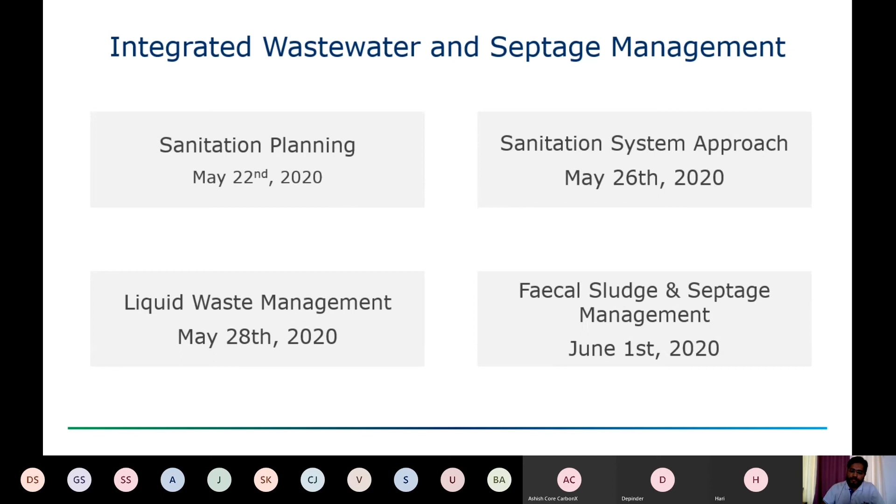So to recap the first session of sanitation planning: we saw that there are numerous urban challenges when it comes to sanitation planning. One of the 2 challenges which most urban local bodies face is that of professional capacity to plan and execute the plan or the systems, and secondly, the management gap - that is the professionals required to run the systems or the financial aid required to run these systems. Then we saw the concept of environmental health, which holistically takes into consideration not just human health, but also the health of the natural environment around us.

For maintaining the equilibrium between the natural environment and the built environment, we saw that we need 4 different kinds of environmental services: water supply, sanitation, solid waste management, and stormwater management. After that, we saw how environmental sanitation promotes social development instead of just designing infrastructure projects and executing them. Hence, we are prioritizing the quality of life when we take environmental sanitation as one of the approaches.

In the last session, we also saw how waste streams are segregated based on their characteristics. We saw major types of wastewater, which is brown water, gray water, black water, and then domestic wastewater. Then we saw there are different processes and management steps involved to manage these different waste streams. The processes involved are basically user interface, collection and conveyance, treatment, and reuse or disposal, whereas management consists of financial aspects, planning aspects, and operation and maintenance of the systems.

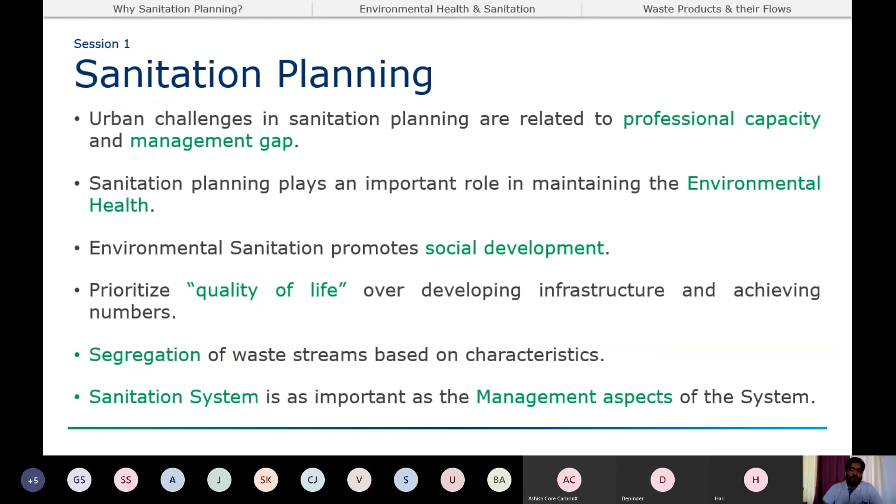Today, we are going to take a look at an approach towards sanitation planning called sanitation system approach. In this session, we are going to see different kinds of sanitation systems. We are going to see examples of one type of system, that is dry sanitation system. Then we'll deep dive into wet sanitation systems, which is mostly prevalent in most industrialized countries and also Asian countries. And then lastly, we'll take a look at 2 case studies - 2 very different case studies, but having a very similar output, that is wastewater treatment.

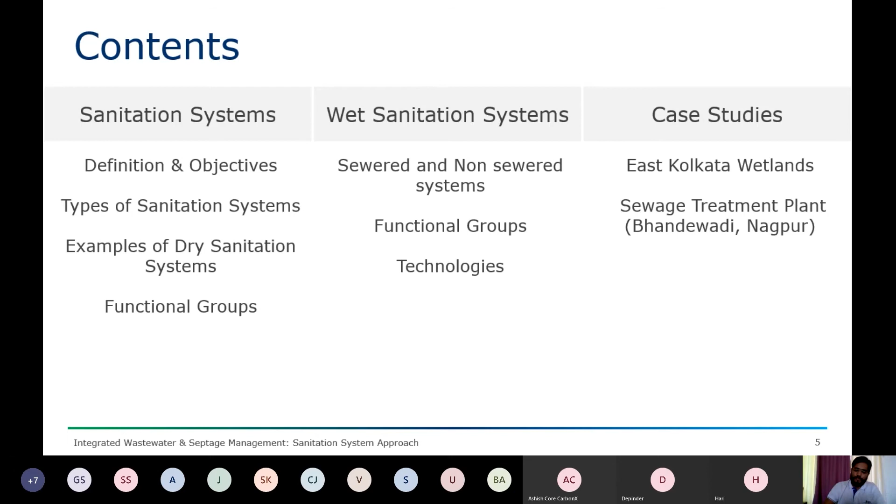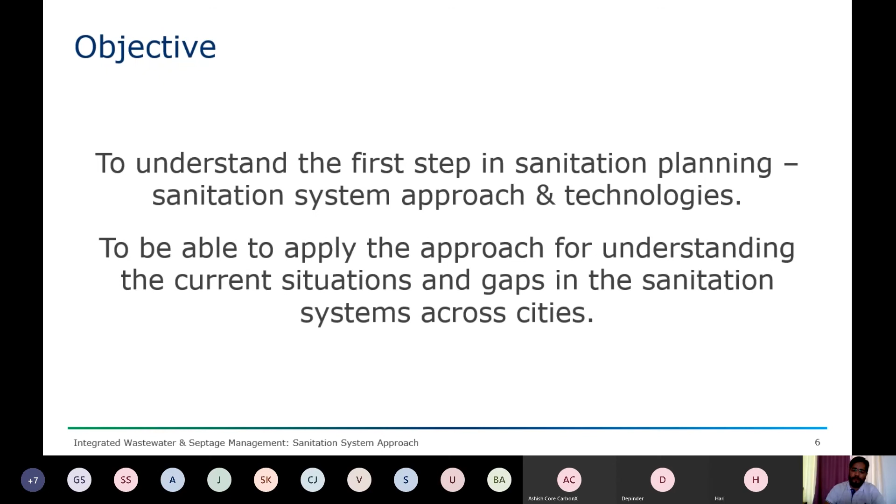The objective of today's session is to familiarize you with the sanitation system approach and discuss different technologies involved in these systems. This approach not only helps during sanitation planning, but even to understand the ground situation, to assess the situation, to find the gaps, and then to identify the correct solution for the sanitation system or for taking care of the human excreta. So to start with sanitation system, the definition of sanitation system is to take care of

human excreta and wastewater from the point of generation to the point of reuse or disposal. And during this complete process, there should be minimal human intervention. The objectives of sanitation system are basically in line with environmental sanitation, that is to protect and promote health as well as the environment. Then it should also be simple and straightforward in terms of technology. The most important is the affordability of the system - the whole system should be affordable and in such a way that it can be operated and maintained throughout its

life. The next objective is it should be culturally acceptable. Different cultures demand different types of user interfaces, which is one of the functional groups in the sanitation systems, and hence the systems you are thinking about should be culturally acceptable. And last but not the least, it should work for everyone - that is, it should work for the lower income groups, the middle income groups, and also the higher income groups.

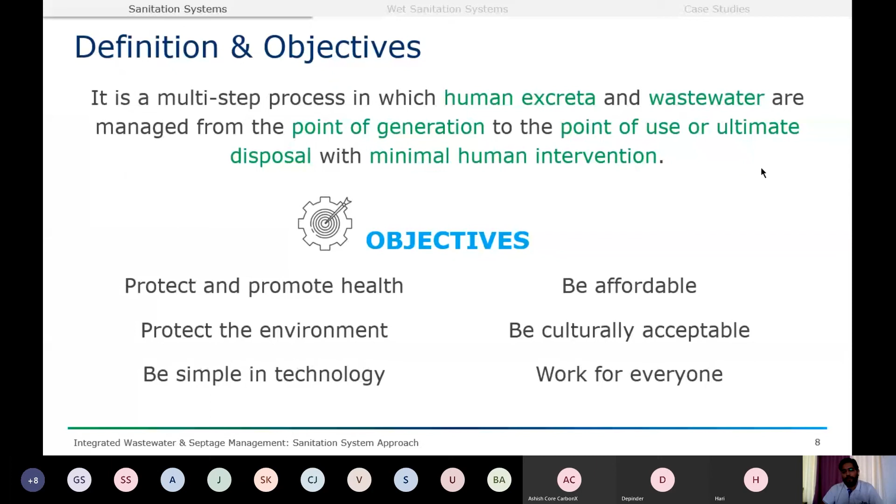On the screen, you can see different types of sanitation systems. Sanitation systems are basically divided into two types: wet systems and dry systems. Simply put, wet systems require water for flushing human excreta, while dry systems require no water. We'll be looking into wet systems in detail.

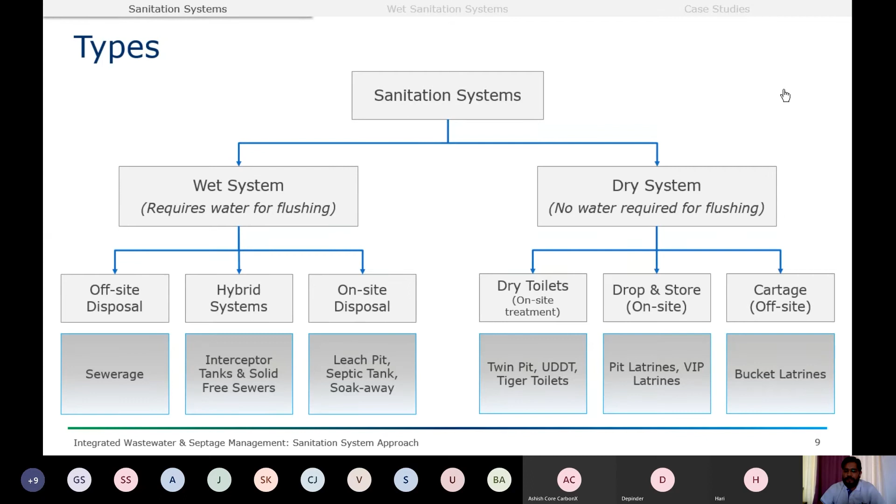So let's now focus on dry systems. Dry systems usually consist of three types: cartage, drop and store, or dry toilets. Let's take a look into the dry sanitation systems.

On the screen you can see two prototypes or two types of dry sanitation: a bucket latrine and a pit latrine. A bucket latrine is simply a bucket with a seat, sort of a toilet seat, on top of it. Inside this bucket, there is a plastic bag which holds all the fecal matter and the dry cleansing material.

It is easy to just pick up the bag, wrap it up, and give it to the person who has come for picking up the waste, then simply replace the old bag with a new one. These bucket latrines are quite famous or used in African countries where there is lack of water resources. They are also popular in slums where not enough space is available to set up an individual toilet for each household.

On the left hand side, you can see a simple pit latrine where there is a closed lined pit under the seat where the fecal matter drops and is stored. Such pit latrines need to be emptied after a few weeks or a few months, depending on the usage.

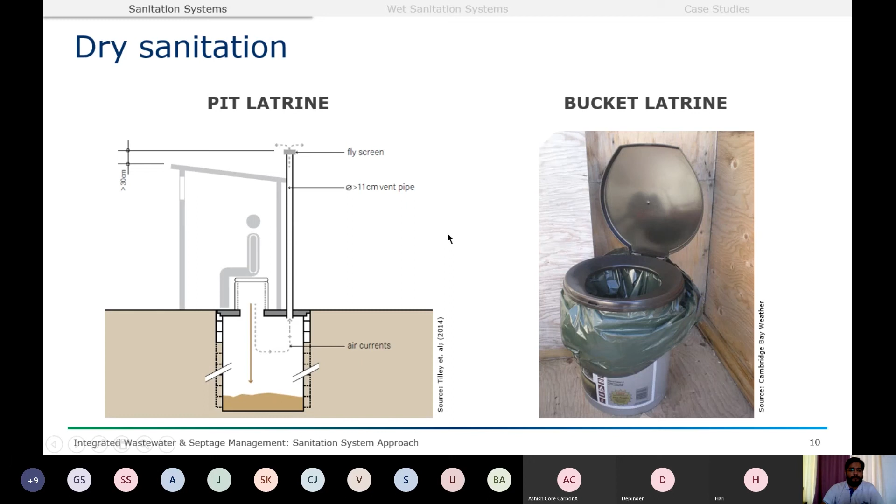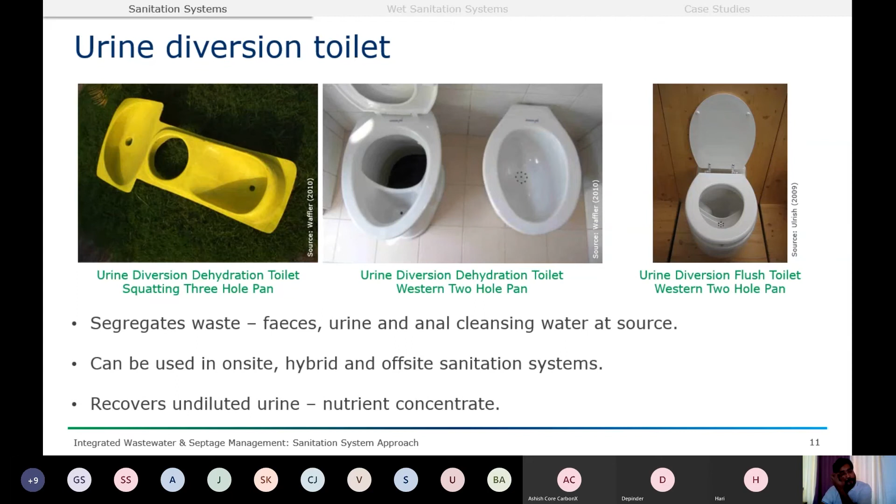A typical urine diversion dehydration toilet looks like this. It has a seat and two vaults underneath. When one vault is completely filled, the user starts using the second vault. The fecal matter dropped into the vault has to be mixed with a dehydrating agent like fly ash, wood chips, sawdust, or even soil.

Over a period of time, the fecal matter dries out completely and gets converted into something called human compost or humanure. Urine, which is also segregated using this toilet, can be stored in jerry cans, and after undergoing a sanitization process lasting 3 months, it can be applied to agriculture fields.

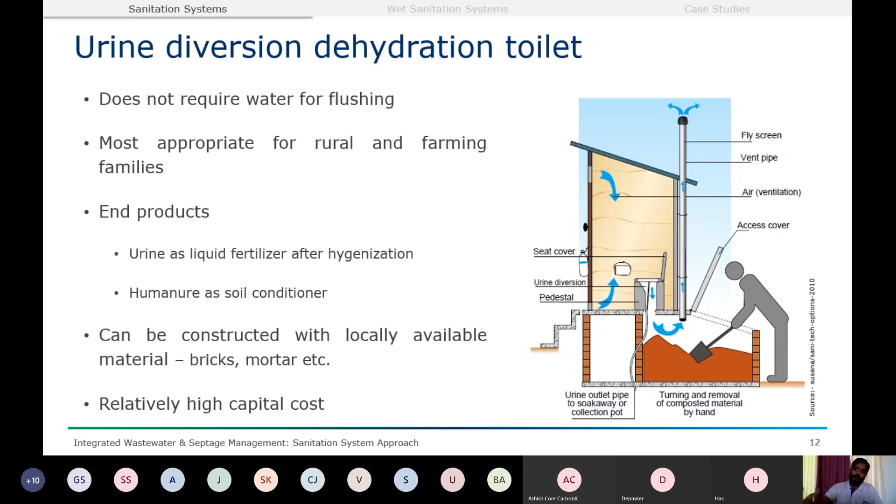The cost of a urine diversion dehydration toilet is relatively high compared to a pit latrine or bucket toilet, because there are two vaults and a requirement of two seats. So the area requirement is also high, as well as for the superstructure, whose function is to provide a safe enclosure for the user, which also increases the cost.

Next is a very recent innovation called Tiger Toilet. The superstructure looks very similar to a pour flush toilet, but beneath it there is a vault which contains vermicompost, and in this compost there are worms known as tiger worms.

When the user flushes the toilet, or even without water, when the fecal matter drops into the vault, the solids are retained on the surface of the compost where they are degraded by these tiger worms, and the water percolates through the drainage layer into the ground. As soon as the fecal matter drops, the process of degradation starts.

Timely emptying of the compost is needed, depending on usage, and it can be emptied after a few months. The cost of this toilet is lesser than UDDT, and hence it is more popular nowadays. This tiger toilet has been used in India as well as in Bangladesh, where it is more famous. Oxfam is one of the agencies promoting tiger toilets and implementing them across Bangladesh.

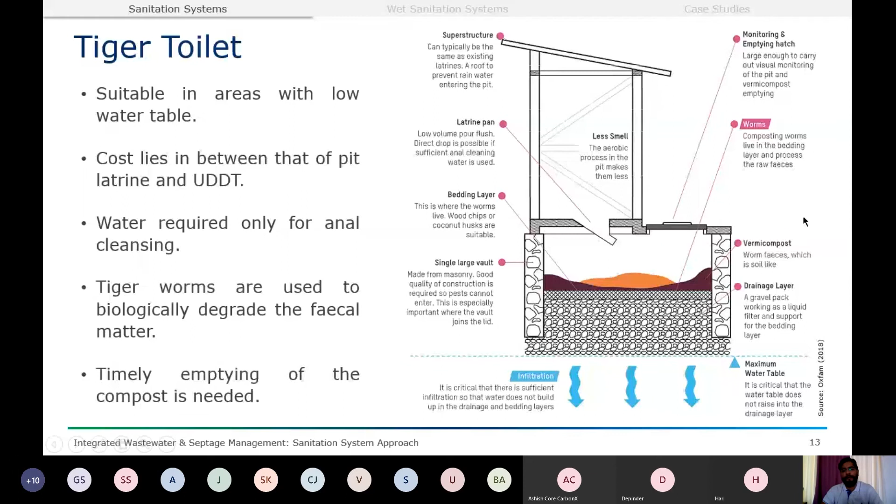So now that we've seen dry sanitation systems, we saw that they are quite simple in terms of approach. But when we move to wet sanitation systems, there are different functional groups. Functional group is the term used for all kinds of units which function in the same way, for example different kinds of toilets. These different types of toilets are termed as user interface.

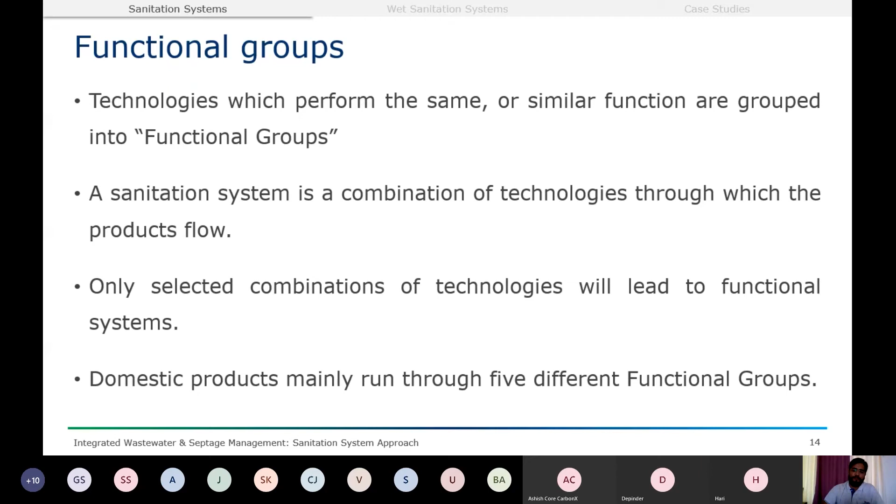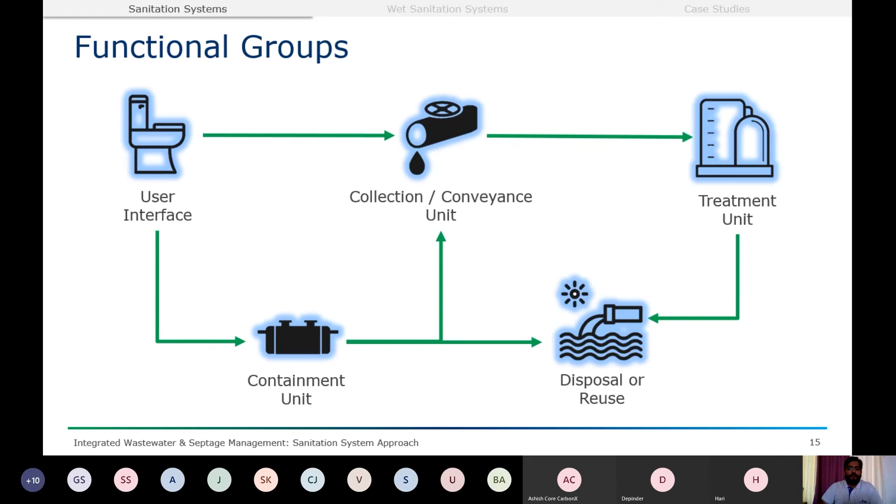These functional groups have been clubbed together to form sanitation systems. In the further slides, we'll see how these systems look like. On the screen, you can see 5 functional groups, starting with user interface, where the waste products are introduced into the system. Second is the containment unit, for example, a septic tank. Third is collection and conveyance, where the solids as well as the water is collected and conveyed to a treatment unit, which forms the 4th functional group. After treatment, whatever the treated products or end products are there, they are reused or disposed in the 5th functional group. These green arrows denote the way in which the waste products travel throughout the system.

Now let's take a look at wet sanitation systems. Wet sanitation systems are quite popular in South Asian countries and also in industrialized countries. Mainly the countries where water is abundantly available, wet sanitation systems are prevalent.

Wet sanitation systems can be divided into 2 categories: sewered and non-sewered. Let's first see what sewered sanitation means. Sewered sanitation mainly consists of off-site disposal, which needs sewerage and a wastewater treatment plant. All the solids and liquids mix together, are collected and conveyed through sewerage, then treated in an STP, and then disposed off-site, that is away from the household.

Whereas non-sewered sanitation mainly means on-site disposal, wherein the household uses the toilet and the liquid waste goes into a tank like a septic tank or soak pits, and the complete treatment happens there itself. So there is no requirement of collection and conveyance in this case for the liquid effluent.

However, in India, there is a thin line between sewered and non-sewered, and hence we have hybrid systems. In hybrid systems, the households have a septic tank where the solids or sludge gets settled, which is also known as septage. The effluent of the septic tank is put out by the household into the stormwater drains or the drains which run along the roadways. Since this effluent is not managed at the household level, this system is known as a hybrid system, and hence there is a requirement of collection and conveyance in this case.

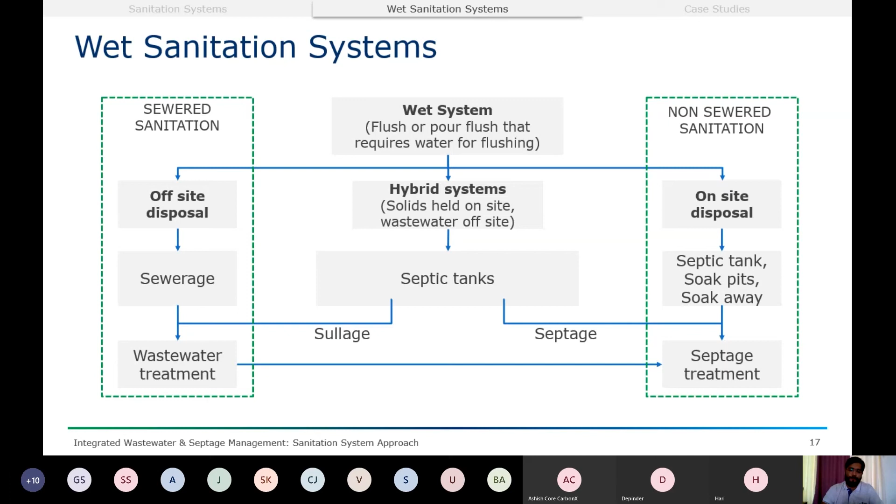In this session, we'll be taking a look at 4 functional groups in wet sanitation systems, the ones that arrive before treatment. The first is user interface, second containment, third conveyance, and last collection and transport, which mainly looks at collection and transport of septage or fecal sludge.

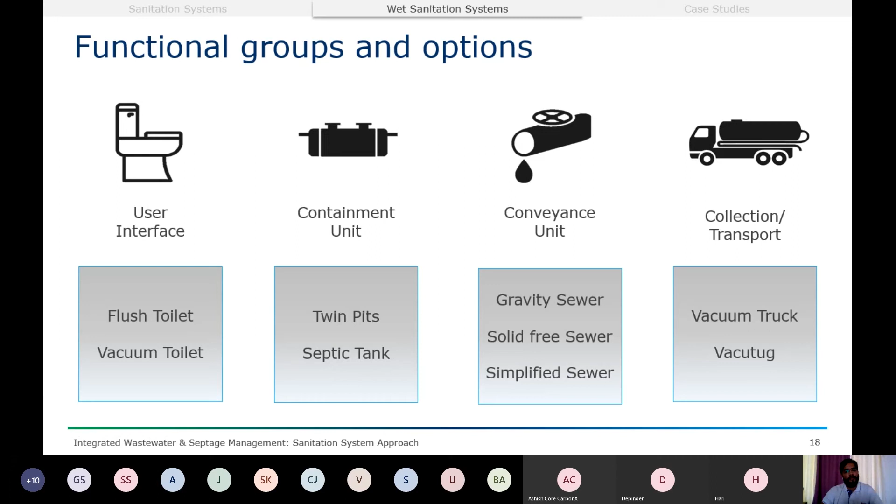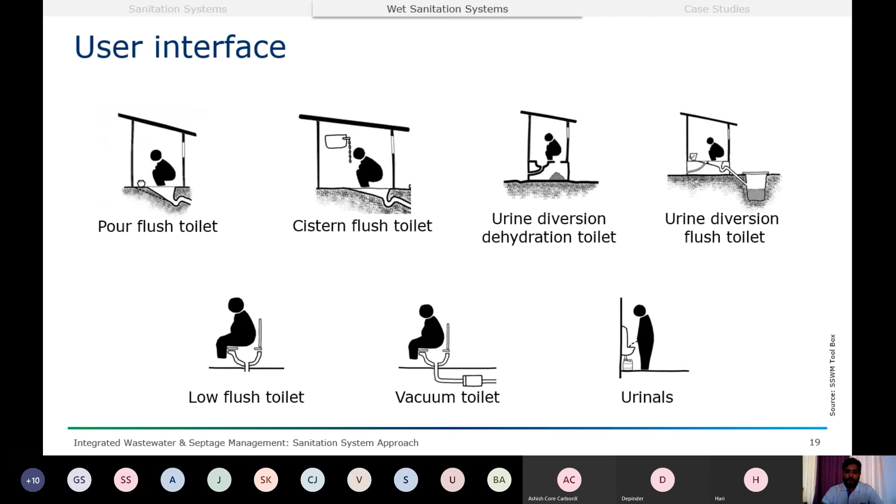The user interface is mainly the unit which is used where waste products are introduced into the system, such as flush toilets or vacuum toilets. On the screen, you can see there are different types of user interfaces in sanitation systems. It can be flush toilets, Ecosan toilets or UDDT, or low flush toilets, as these are used at airports or in hotels nowadays. Vacuum toilets are mostly seen in India in airplanes, but in other developed countries they are used for entire communities. For example, the World Islands in Dubai have a complete sanitation system based on vacuum toilets. Also, a simple thing like a urinal can be termed a user interface, because it brings urine into the system.

Now let's take a look at a type of flush toilet known as the pour flush toilet. In the first session we saw that pour flush toilets were introduced in the late 19th century. The S-trap, which is still being used, was invented in 1775, for the purpose of reducing odor, since these flush toilets, whenever excreta gets mixed with urine and water, produce a lot of odor. This S-trap has a water seal integrated into the pan, which helps minimize the odor in the toilet, enhancing the user experience.

Also, flush toilets nowadays have a very low capital cost, because these pans are produced in mass quantities. There are different materials used to make these pans. Mostly it is ceramic, but in order to lower the cost and make them more affordable in rural contexts, plastic or fiber-reinforced plastic pans are nowadays used.

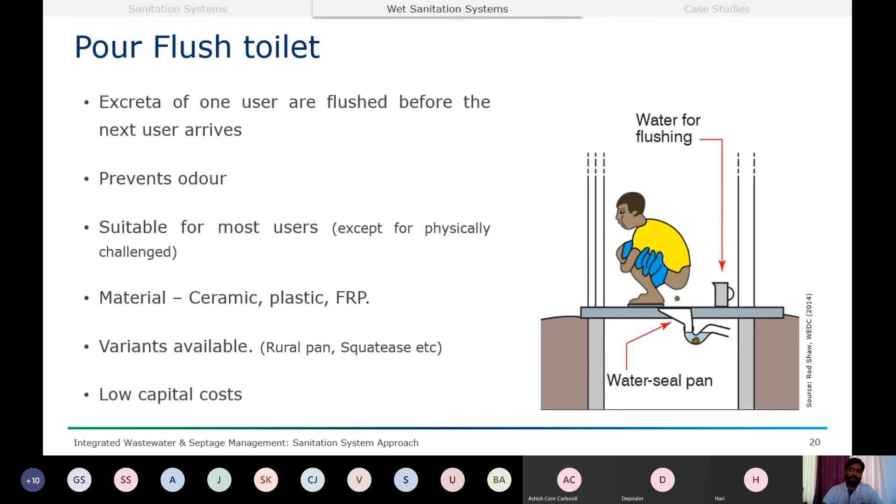The next is cistern flush toilet, where we have integrated a tank in order to flush the toilet. This kind of toilet was invented in the early 19th century, where the ball cock or ball valve was used in order to maintain the level of water into this cistern, and discharge at a pull of a lever a fixed volume of water, around 8 to 12 liters, into the water closet pan, hence flushing the whole system and replacing the water seal with fresh new water for the next user.

Nowadays, we do have low flush toilets which only consume 4 to 6 liters of water per flush.

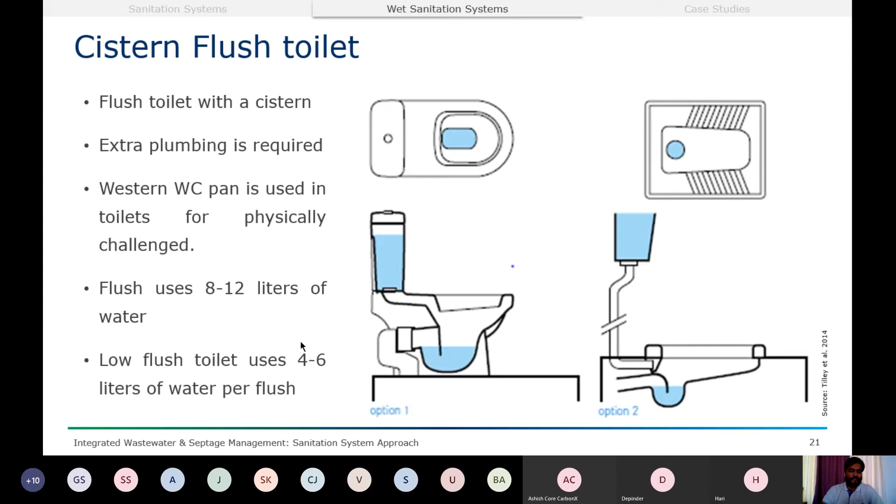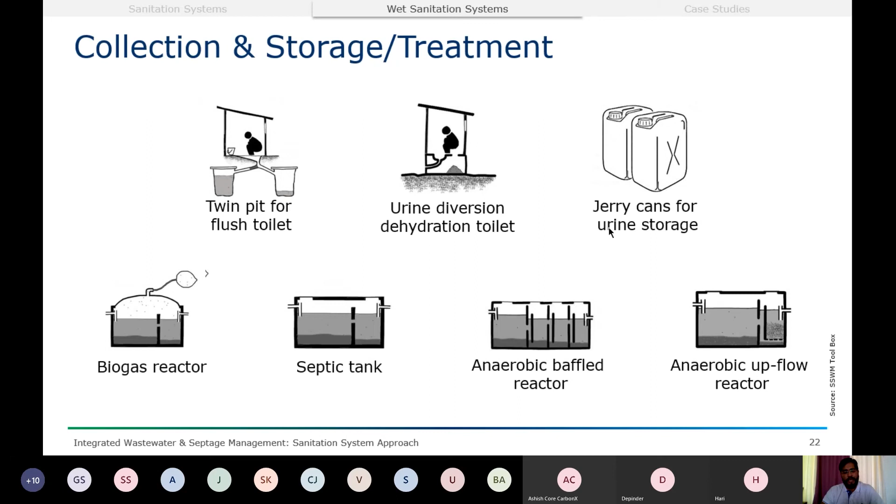Moving on, we have collection and storage as a functional group. Here we have several options ranging from twin pits or leach pits, the dehydration vault, jerry cans, which are used in case of UDTs for storing urine, or a simple septic tank.

The twin pit units are linked to a pour flush or a cistern flush toilet. Here we have two pits where the fecal matter is mixed with water and is flushed down into the pit. When the one pit fills up, the seal is opened and the fecal matter or black water is allowed to drain into the other empty pit.

During a course of months, the content of the first pit gets decomposed completely and converts into humanure. Whereas by the time the second pit fills, the user has to empty the first pit. It can be simply emptied using a spade, because in this case the material is now completely treated and there are very few pathogens. So it can be manually emptied using a spade with minimum requirement of personal protective equipment.

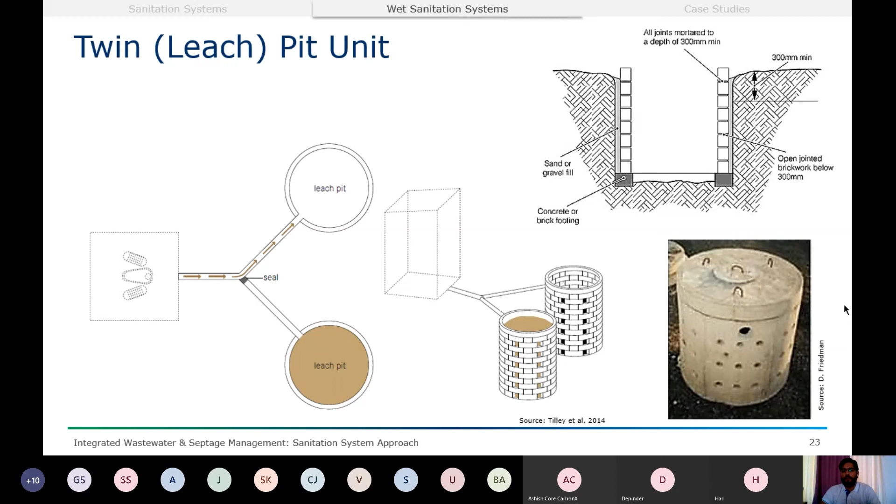On this slide, you can also see a prefabricated leach pit, which are designed and now installed in a lot of places to ease or to expedite the process of constructing leach pits.

The second option, which is mostly common and very much used in urban India, is the septic tank. Septic tank provides primary treatment in the form of sedimentation and biological decomposition of the settled solids.

When the wastewater or black water enters the septic tank, in the very first chamber sedimentation process occurs. The solids which are heavier than water settle down, and the scum or oil, fat, and grease, which is lighter than water, float on top. The clear water goes into the second vault where the same process continues, and then the water exits through this T pipe.

The function of the T pipe at the inlet and outlet is to allow the incoming water — the function of the T pipe is not to disturb the scum and the sludge, and to allow the incoming water to get introduced in the central part of the septic tank.

The septic tanks are designed in such a way that the sludge retention time is from 2 to 3 years, and in these 2 to 3 years, complete decomposition of the sludge happens.

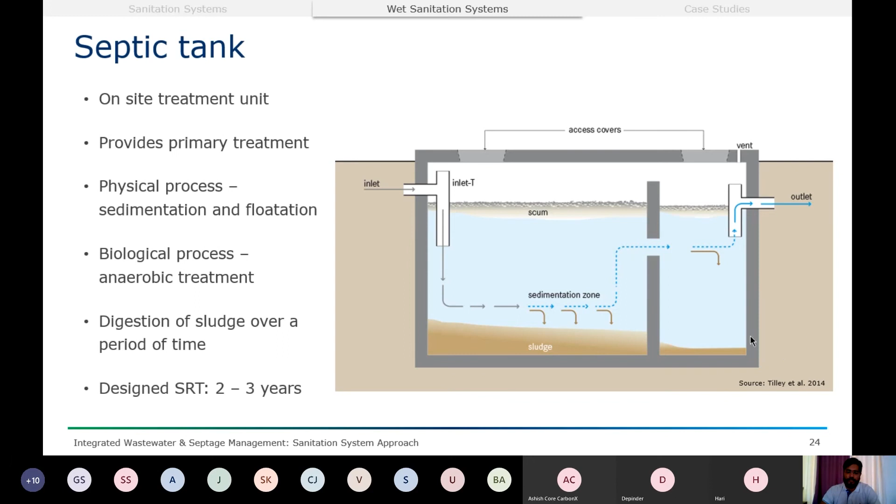Now, from the septic tank, there is a liquid effluent which comes out. Or in sewered sanitation, the black water or domestic wastewater needs to be collected and conveyed. And hence, we have different types of sewerage systems or different components used in sewerage systems.

The conventional sewers, which used to convey not just the domestic wastewater but also storm water during the monsoon season, are known as conventional sewers. However, now CPHEEO manuals stress upon the use of separate sewers, that is, different sewers for conveying the domestic wastewater and different sewers for conveying the storm water.

Simplified sewers are mostly used in slum areas where there is lack of space for implementing separate sewers. Small bore sewers are mostly used in conjunction with an intercepting tank.

To collect and convey the solids which are trapped on site in a septic tank or any other form of containment system, we do need motorized emptying and transport. We'll be looking at a few examples further in this session.

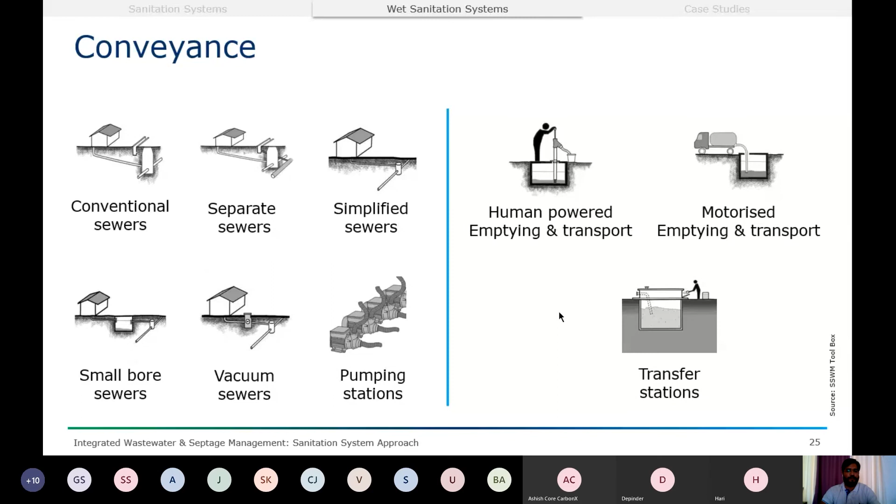Let's take a look at how gravity sewers work. In gravity sewers, all kinds of properties — households, commercial properties, or even high-rise buildings, which produce different characteristics of wastewater — everything is mixed and conveyed in a common pipe.

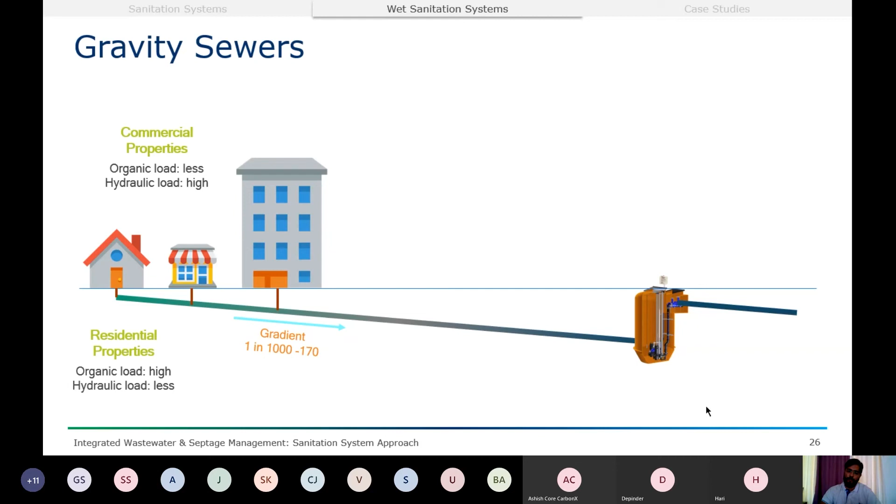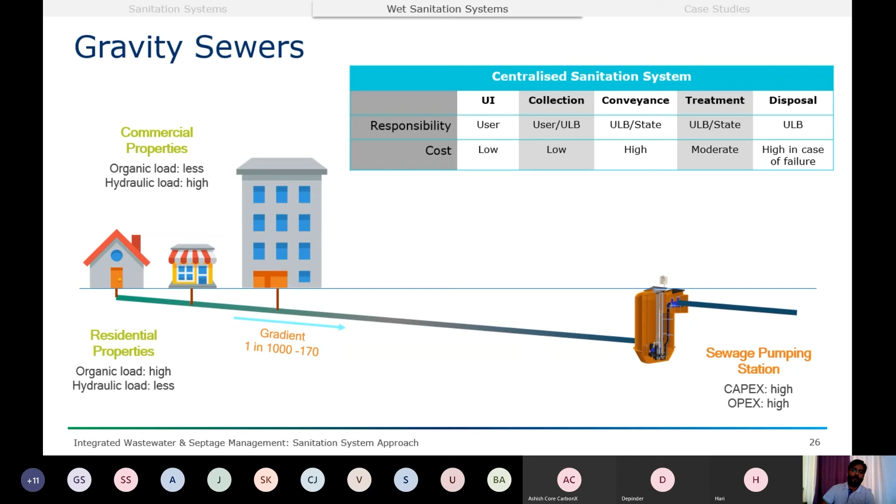As soon as the depth of this pipe reaches 6 meters, there is a requirement of having a sewage pumping station. The sewage pumping station lifts the wastewater from the bottom of the station to the top, and again this cycle continues. So the sewage pumping station has a very high capital as well as operational cost and is an integral part of gravity sewers.

Let's look at how solid-free sewers are different from gravity sewers. Although gravity is used here to convey the water, each property has its own septic tank. A septic tank traps all the solids and allows only the liquid to flow out. The liquid, since it contains no solids, can be conveyed over larger distances with a smaller gradient, and hence we can cater to a large number of properties without the need for a pumping station.

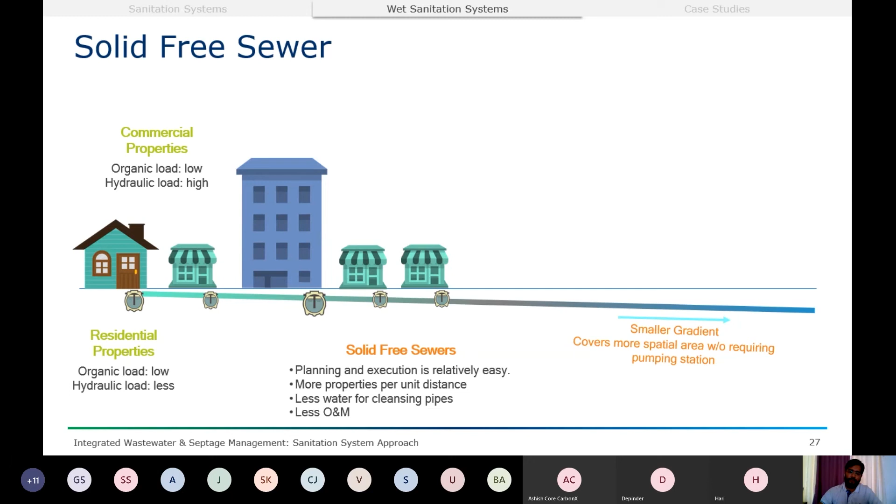Solid-free sewers are relatively easy to operate and maintain, and since they are laid at a shallow depth, the capital cost of solid-free sewers is significantly less as compared to gravity sewers.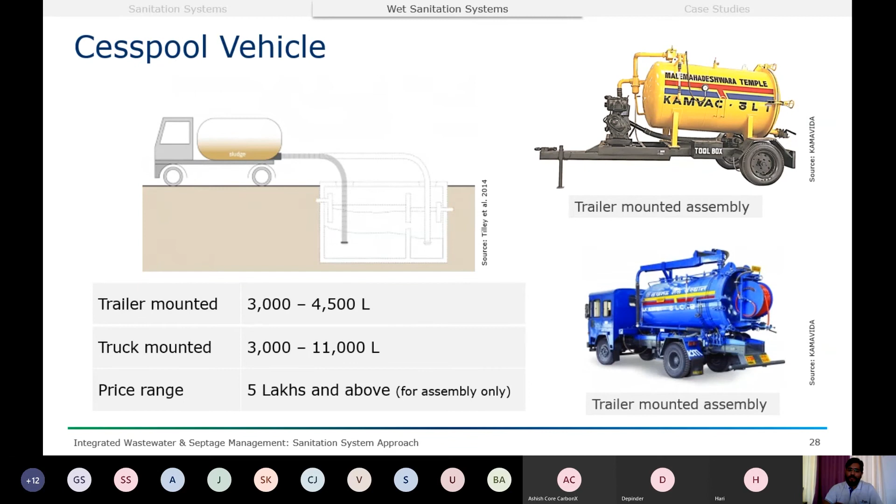The second type is a truck mounted assembly. The chassis of the truck holds the tank as well as the other accessories required for the cesspool vehicle to operate. In truck mounted assemblies, we can have variants starting from 3,000 liters up to 11,000 liters. The price range of these assemblies starts from 5 lakh and above, but that 5 lakh is only the cost of the assembly - the cost of the truck or tractor is additional.

Let's take a deeper look into the components of cesspool vehicles. The most important component, which sets it apart from a normal water tanker, is the vacuum pump itself. At the bottom of the truck, you can see the vacuum pump, which has three main components: the vacuum pump, the hydraulic motor, and the service liquid or oil pump. All three of these are required to operate the vacuum pump.

Then comes the tank and its accessories - such as the outlet pipe, which also functions as the inlet pipe, and the hatch or door itself, which swings completely open so that during maintenance, or to do something from inside, the tank can be fully opened. There are also different accessories or safety features which protect the vacuum pump from the liquid itself.

The process by which the vacuum pump works is very different compared to a centrifugal pump. In a centrifugal pump, the water flows through the pump, whereas in a vacuum pump, it's the air which flows through the pump while the liquid is sucked directly into the tank and stored there. The vacuum pump needs to be protected from solids as well as moisture, and hence various safety features are required.

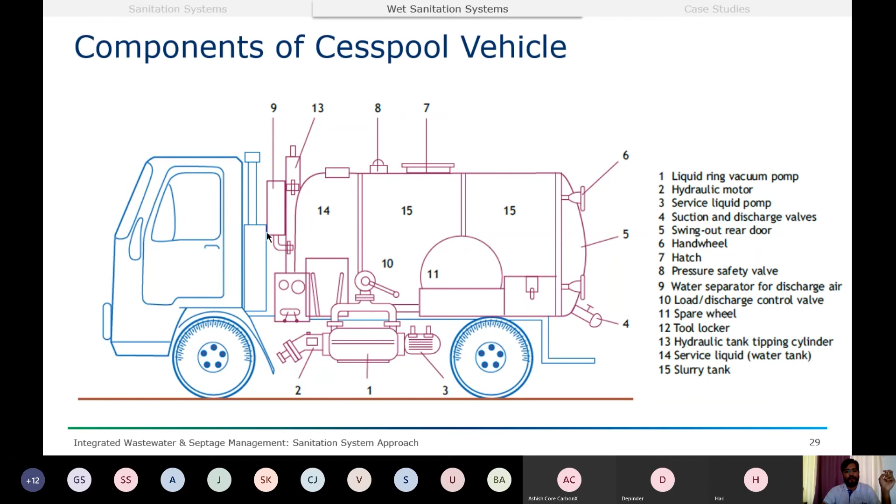The minimum width of cesspool vehicles is 3 meters, and hence most of the time these vehicles are not appropriate for catering to septic tanks in slums or communities with very narrow roads. Also, the suction power of the vacuum pump allows only 100 feet of suction, so sometimes it's not possible to park the vehicle next to the septic tank and empty it.

Hence there is a requirement for a smaller version of a cesspool vehicle, also known as a Vacutug. The Vacutug is a trailer mounted assembly - on the left side you can see a similar assembly mounted on a smaller trailer. The capacity of this tank is 300 liters, and it can be pulled by humans - 2 or 3 persons are enough to pull or tug this Vacutug. On top of the tank, you can see the vacuum pump and motor installed, which creates suction in the tank and sucks in all the fecal matter and septage into the tank.

The picture on the right shows a motorized option, wherein the motor used to run the vacuum pump can also be used to power the front wheels of the Vacutug. Since motorized power is given to the front wheel, humans don't have to tug it, and hence we can have bigger capacities of tank installed. Typically, a 300 to 700 liter tank can be installed on a motorized option.

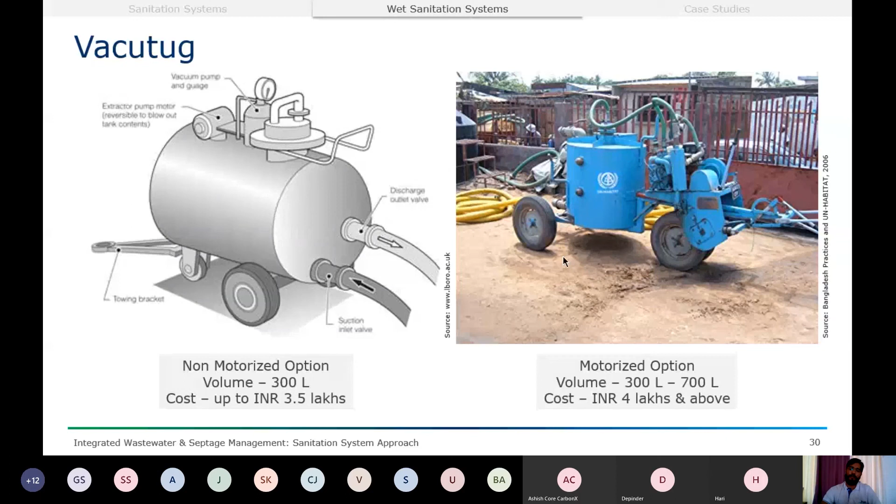The function of the Vacutug, however, is only to empty the septic tank and convey the contents from the household to the cesspool vehicle. Since the capacity of Vacutugs is so small, they cannot be used for conveyance, because tugging these vehicles or using a motor can be quite costly. Hence they are used in between the cesspool vehicles and the septic tanks.

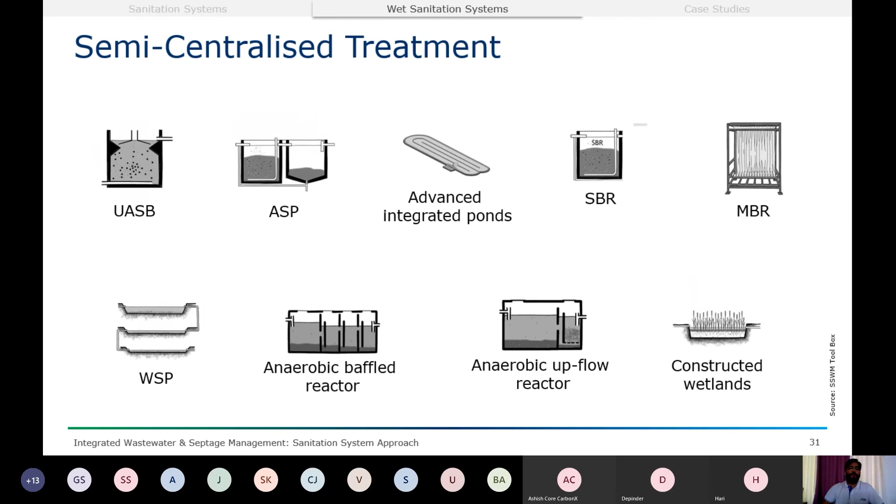The next functional group is treatment, where we have different kinds of treatment, natural as well as mechanized, aerobic or anaerobic process. However, due to the limitations of time, we cannot cover the treatment systems or treatment units in this session. We'll be having a different session altogether, prioritizing only treatment options.

And the last functional group is reuse or disposal. Usually the treated products, such as treated water in a centralized STP or the biosolids, are disposed of. The treated water mainly goes to streams or surface water bodies, whereas the biosolids are usually dumped onto the land or taken to the landfill.

However, there are several reuse options available. Agriculture can be one of the most important sectors where the treated end products can be used. The biosolids can be very well used as compost. The water, which can be made rich in nitrates and phosphates, can also be used for fertigation.

Next is aquaculture. Aquaculture is cultivation of fishes or water-based agriculture. So the treated wastewater can also be used in aquaculture. We'll be seeing one such case study in this session.

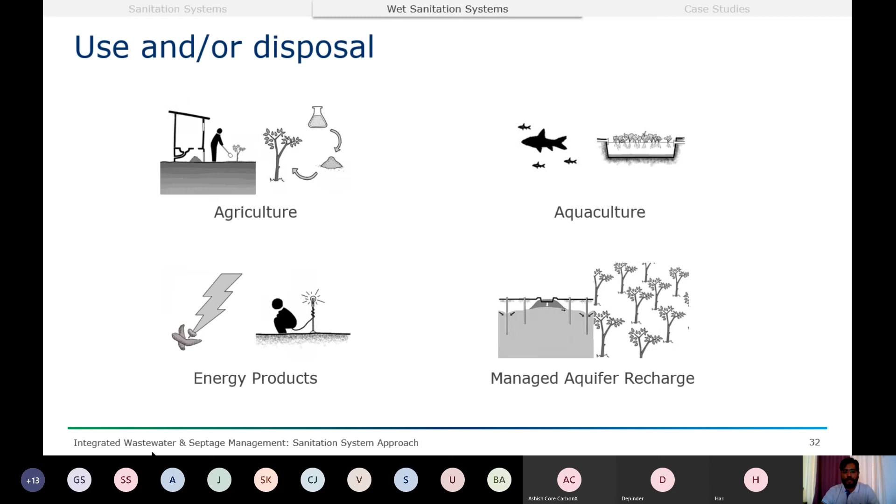There are several energy products, that is biogas or methanation, which can be done on sludge, and hence we can also get energy products. And lastly, recharge. The treated water can also be recharged into groundwater. However, it needs to be managed and monitored carefully. Hence, this technique is called managed aquifer recharge, also known as soil aquifer treatment. You can get a lot of information regarding managed aquifer recharge and soil aquifer treatment on the internet.

Now let's visualize how the sanitation system looks like, how these functional groups are interlinked to each other. On the screen, you can see a quite elaborate sanitation system. I'll explain the sanitation system in detail.

On the very first column, you can see different types of waste products. In the second column, you see an interface. In this case, since this system is describing a twin pit toilet, we have a pour flush toilet here. The output of this pour flush toilet is black water, which is diverted into a collection and storage unit, typically known as twin pit or leach pit, where the contents are converted into pit humus and need to be emptied and conveyed, and then reused for application in agriculture.

The grey water, however, has to be handled separately. The most simplest method in which grey water can be handled is to use a soak pit or a leach field. So this is how we can see how a sanitation system can be visualized.

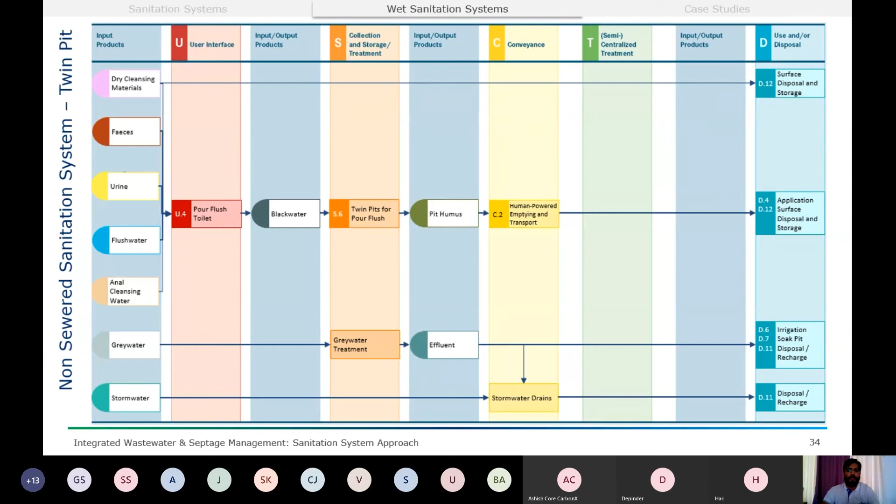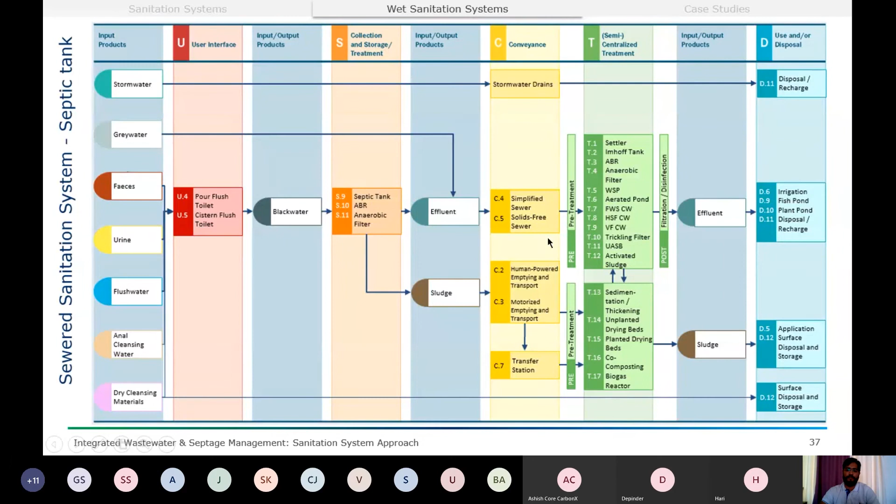Lastly, the most simple or very straightforward system is a sewered sanitation system, wherein the black water or domestic wastewater is collected and conveyed using gravity sewers, where it goes into a centralized STP. The treated wastewater is usually disposed of into rivers and the sludge is sent to the landfill.

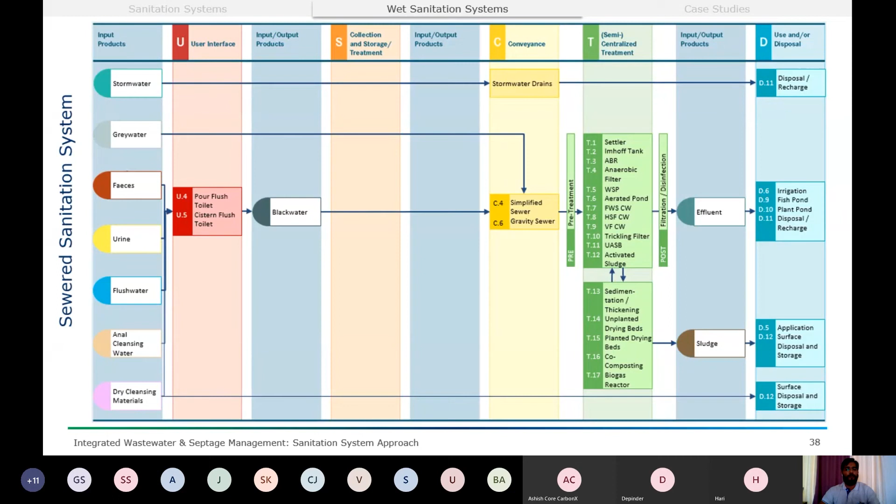So in this way, we can visualize different kinds of sanitation systems. It needs to be understood during sanitation planning of a city that different wards or different regions in a city can be catered to by different sanitation systems, and it largely depends on the population density as well as the availability of area. We'll be looking more into the applications of different sanitation systems in the next session.

So in this case, whenever we are doing sanitation planning, an approach called backwards planning is really useful. In this approach, we try to prioritize reuse. We see what are the avenues for reuse of treated water as well as biosolids in the city or in the given context. From that, we decide what should be the quality of the output of the treatment plant, that is, the quality of the treated water as well as the quality of the biosolids.

Then we design the complete treatment system, and understand what inputs are required to implement, operate and maintain these systems. So basically, what materials are locally available? What kind of human resources or professionals or experts are required? What are the finances? And what sort of extra information from the ground would be required to start the planning process itself? Hence, during preliminary surveys or recce visits for sanitation planning, we usually start from the end of the sanitation system.

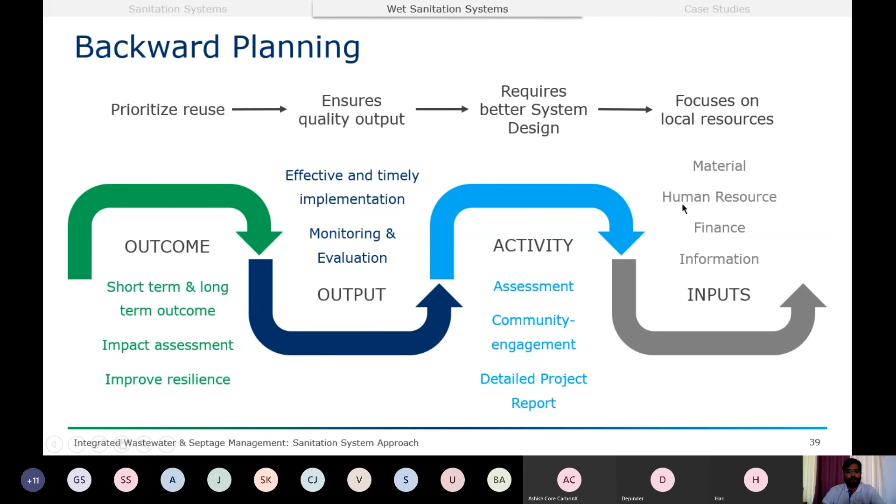Let's take a look at two case studies. Both are focused towards centralized systems. One has sewerage and an STP, and the other has open drains or closed drains, and also in some parts there is sewerage, but the treatment is done in a very natural way.

The first case study is that of a sewage treatment plant situated in Bhandewadi, Nagpur. This STP has a design capacity of 130 MLD and spreads across 12.5 acres of area. It's a huge plant, based on a sequential batch reactor, also known as the SBR process. The key element of this whole project is that the treated water is supplied to a thermal power plant, which is 18 kilometers away from this STP, supplied using a pipeline. Daily, the major chunk of treated wastewater is conveyed to the thermal power plant, where it is used for processing fly ash and for condensation purposes.

So you see here, the whole project was conceptualized by finding the right stakeholder who could reuse the treated water, and the treatment plant and sanitation system were designed accordingly.

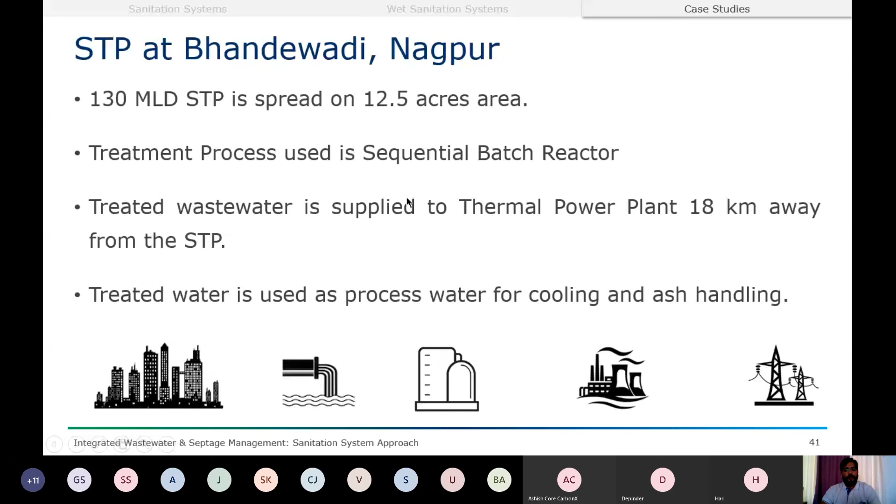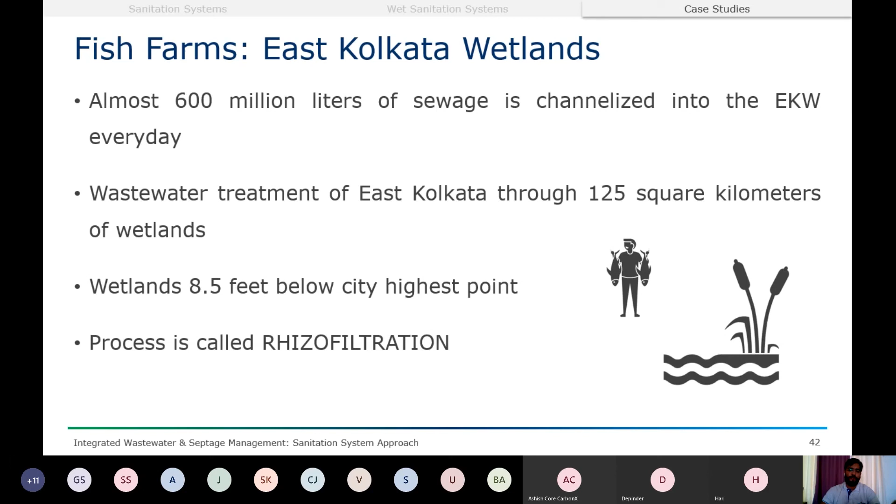Unlike this very technical or technological approach is the second case study, which is fish farms in the East Kolkata wetlands. These wetlands in the east part of Kolkata cater to almost 600 MLD of sewage on a daily basis, conveyed using a network of sewerage systems and also open and closed drainage systems. The wetlands spread over a total of 125 square kilometers. The wetland is situated 8.5 feet below the highest point in the city, and hence the sewage flows under gravity. The process implemented here is mostly rhizofiltration.

The water is then diverted to sedimentation ponds where the solids settle down. Then there are a series of ponds used for pisciculture or fish cultivation, starting from egg pond, nursery, rearing, stocking pond, and harvesting.

The treated water from the harvesting pond is also used in agriculture. And the fish harvested from these wetland systems is a good source of food for Kolkata city.

However, although this whole project is not very technical, for the success of this whole project, the natural conditions were quite conducive - such as hot and humid climate, which is required for fish culture, the shallow ponds or series of shallow ponds, and the area itself.

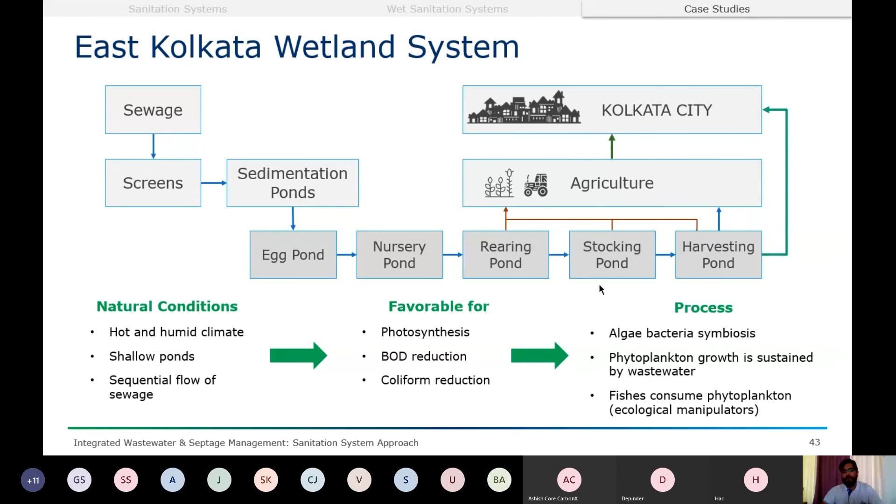The treatment is done using photosynthesis by plants grown naturally in these wetland systems. The BOD reduction happens substantially, and also due to the large hydraulic retention time, coliform reduction happens. This process is a natural process and can be checked out in the video further.

So let's take a look at the video. First, let's see the video of Bhandewadi STP.

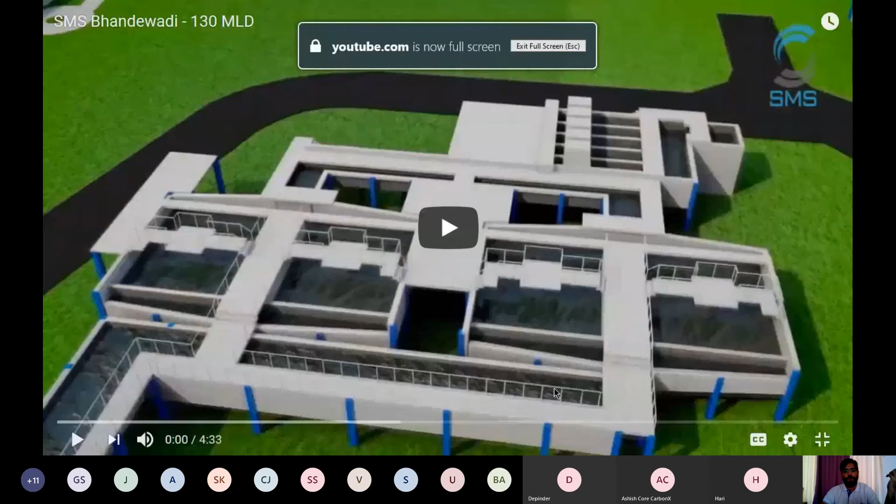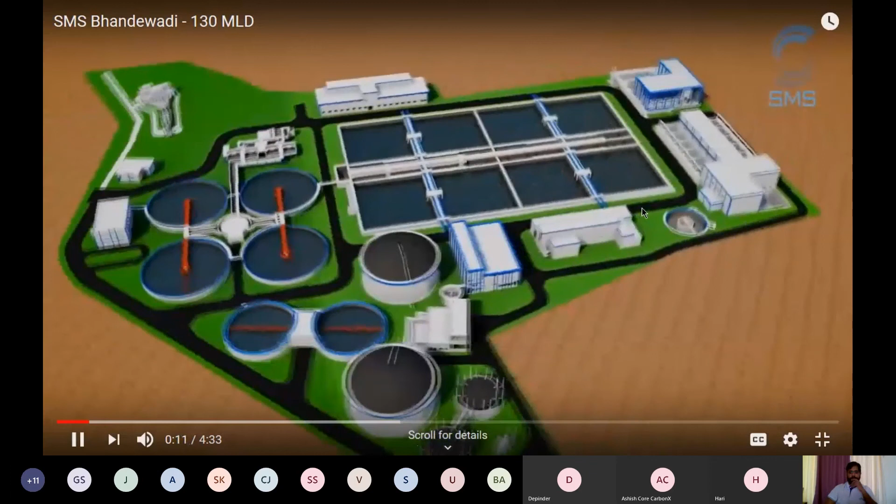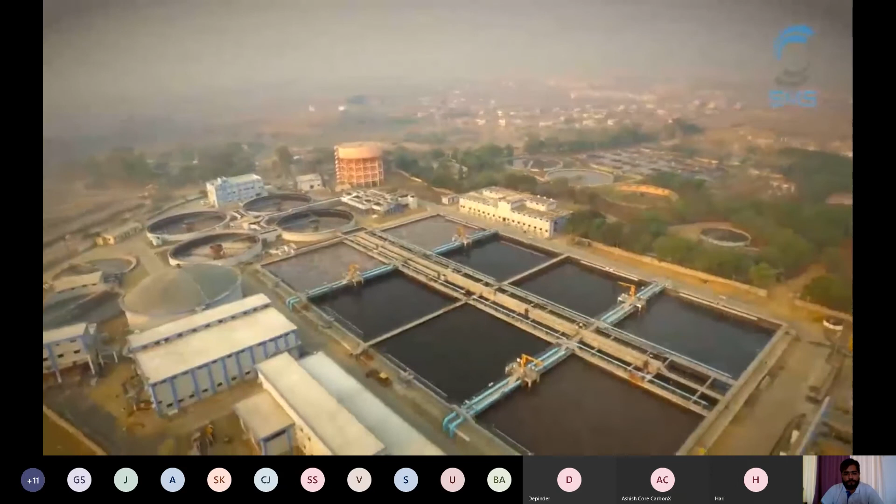Designed and commissioned by SMS Limited, this unique, state-of-the-art, fully automated, and one of the largest sewage reuse plants in India, spread over a sprawling 12.5 acres, takes in 130 MLD of sewage water from the Nag River and cleans it as per the quality standards of a thermal power station before supplying it to Koradi.

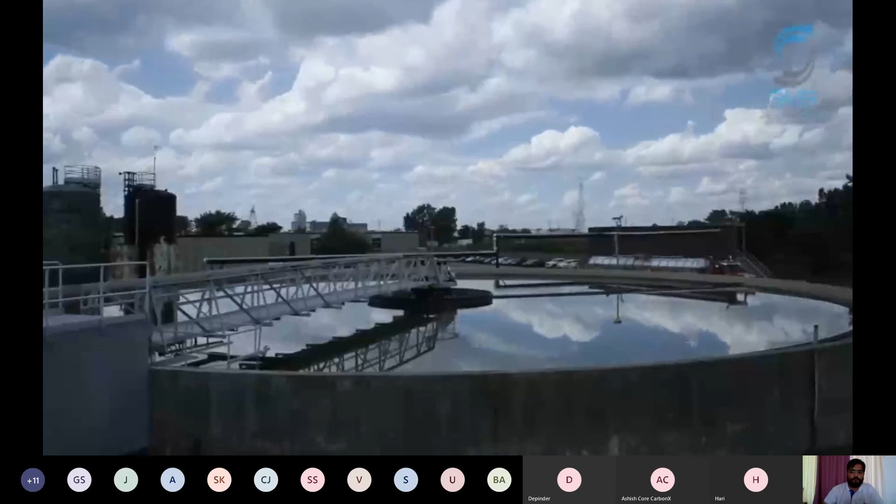Driven by the passion to set global benchmarks in the field of environmental engineering, SMS Limited has designed this plant to harbor a range of structures and equipment that function as clockwork.

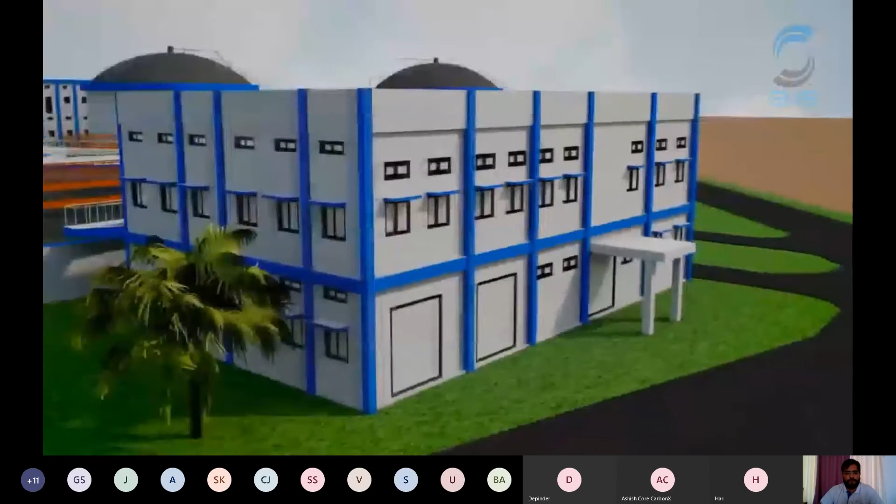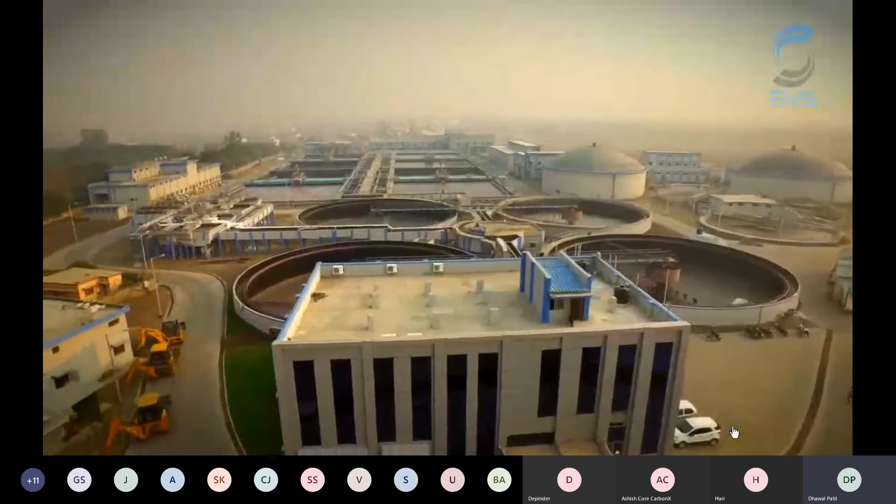The entire process is monitored in this section, housed in a dedicated administrative building. This is the nerve center of the project and houses state-of-the-art equipment and control panels. An electrical indoor 33 kV substation houses control mechanisms. The entire facility is powered by 5,000 kilowatts of energy as regulated by a powerhouse in the premises.

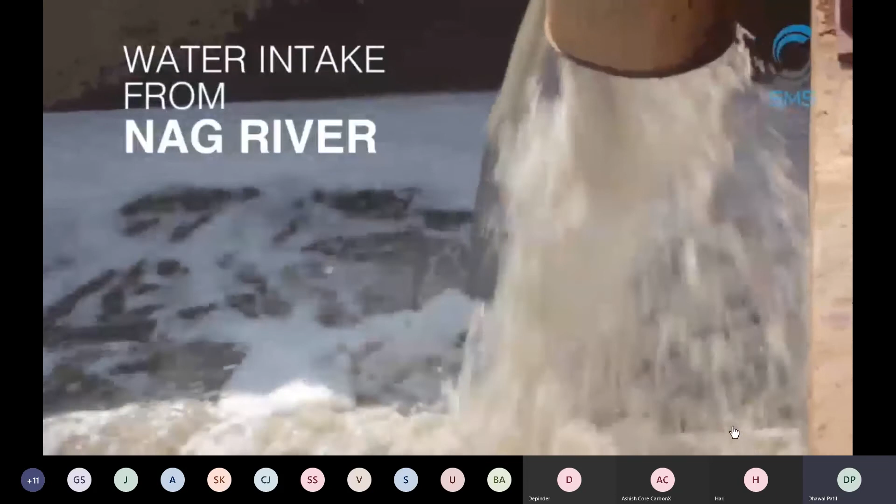Water from the Nag River is brought to the facility through pipeline into the intake structure, where floating material up to sizes of 6 mm is removed by fine screens. The water then passes through mechanical detritors, which remove sand and grit from the sewage water.

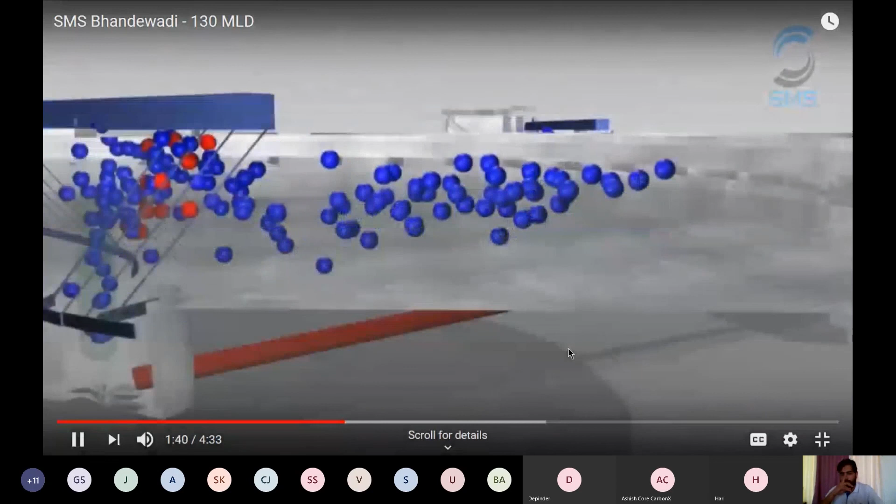After primary cleaning, the water is sent to the primary clarifiers for partially removing BOD and TSS by adding alum at the Parshall flume location. A hydraulic retention time of 30 minutes is given at primary clarifiers for settling purpose.

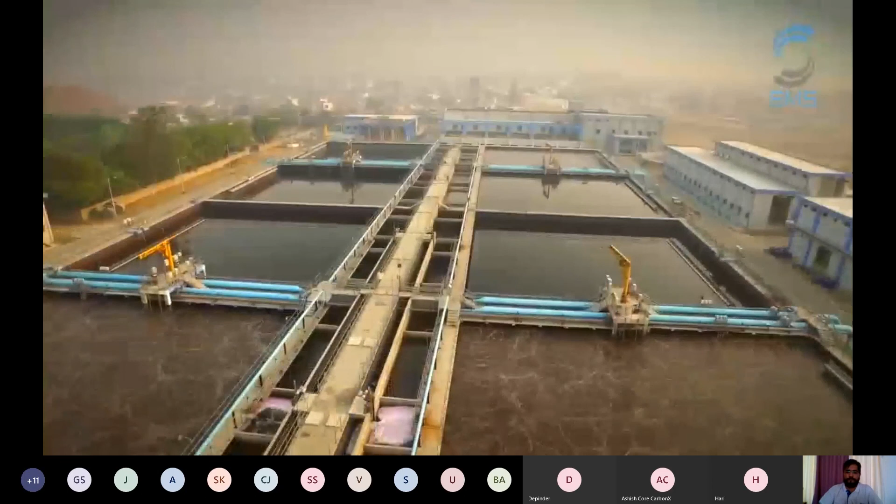After passing through the primary clarifiers, the water overflows through the launder and, through an underground duct, passes to the CTEC basin for secondary treatment.

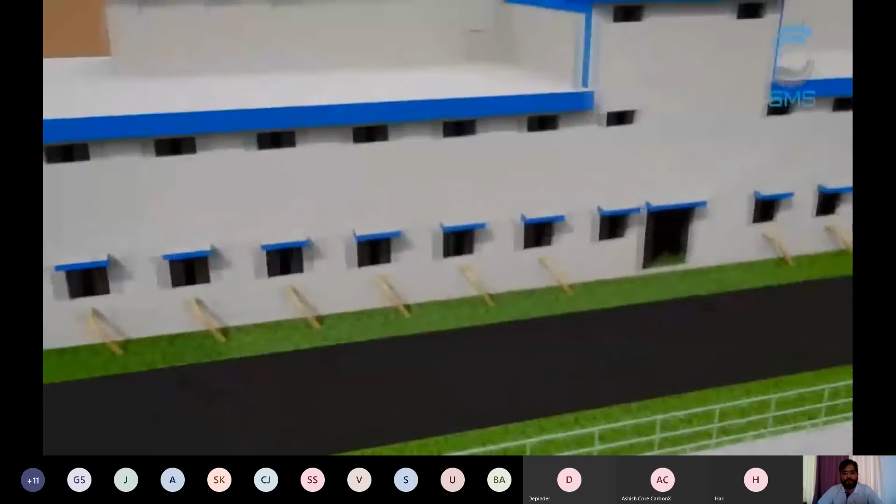The water from primary clarifiers now flows to 8 CTEC basins for aerobic digestion of biological impurities in the presence of oxygen supplied by 24 blowers, housed in 2 buildings controlled by VFDs.

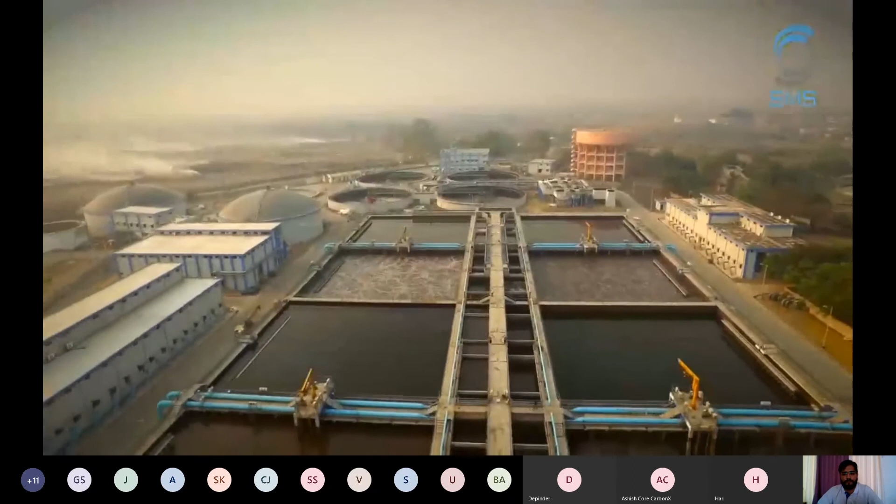This primary cleaned sewage water is now subjected to sequential filling and aeration, sedimentation, and decanting mode for secondary cleaning.

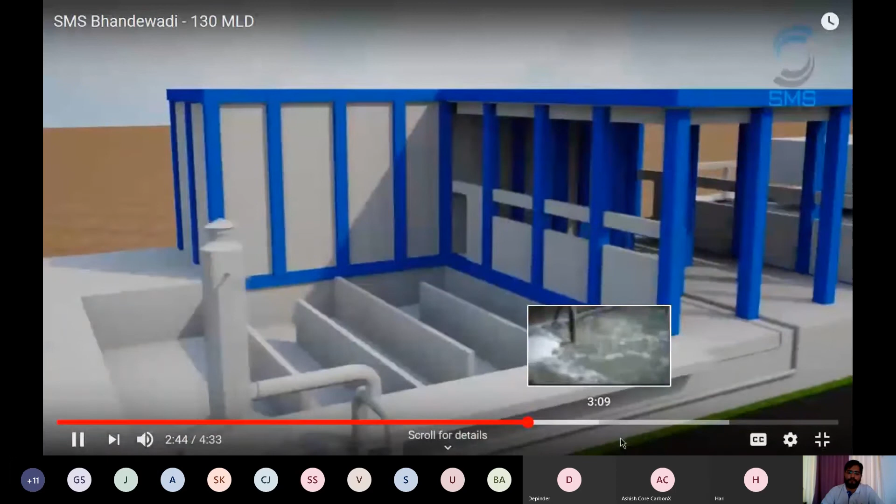The decanted water from CTEC now passes through the chlorine contact tank, or CCT, for addition of chlorine to the treated water for the treatment of harmful bacteria. A chlorine tonner 1 ton tank is used to disinfect the water.

The water, after processing with chlorine, is now passed to a sump from where it is shifted to the tertiary treatment plant using 8 vertical turbine pumps.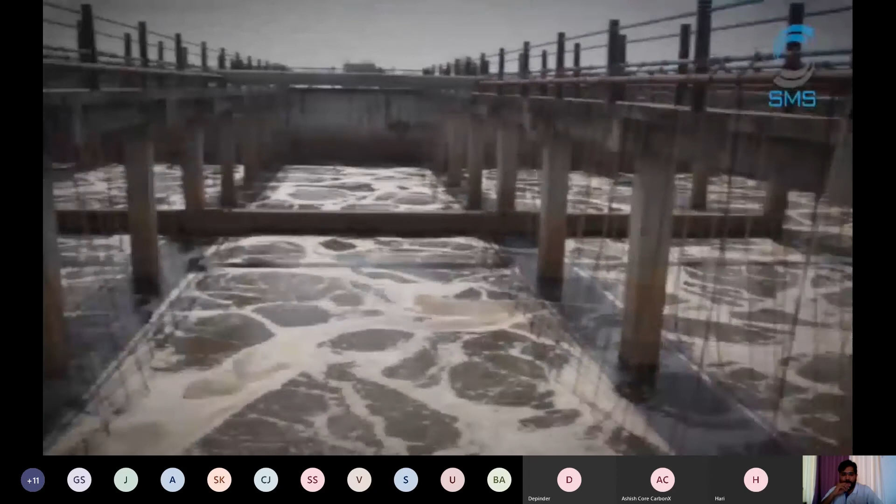In TTP, water is passed through a multi-bed media filter comprising anthracite, sand, and pebbles for final cleaning to achieve the desired parameters as per the requirement of Mahagenco, suitable for the thermal power station requirement.

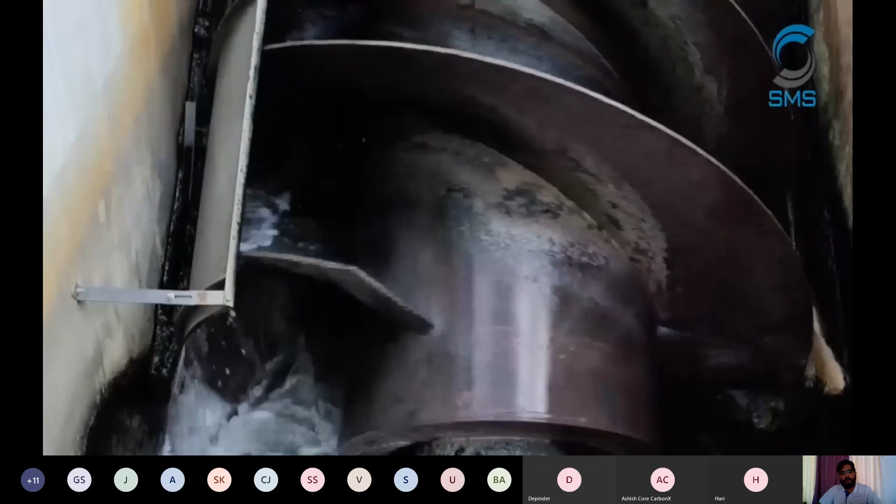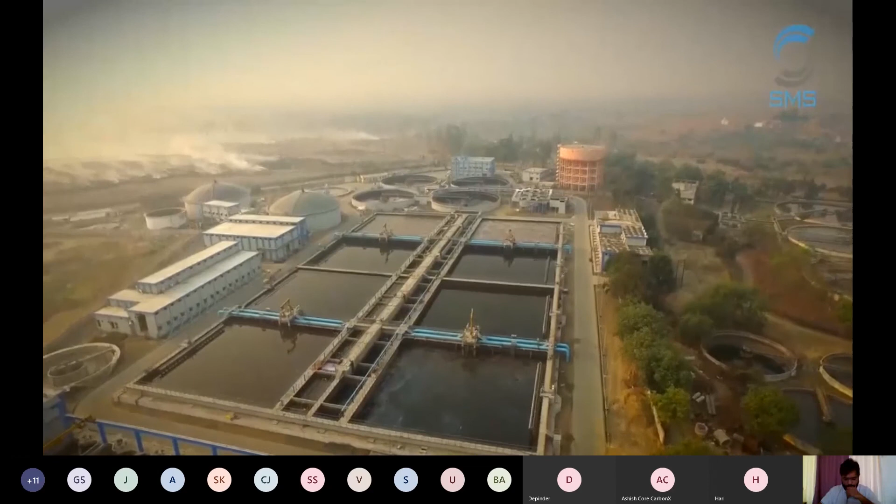This water passes through the filter media to the under-drainage system, from where it is transferred to the pumping sump by rising chambers. 8 vertical turbine pumps are used to transfer this treated water to Koradi through a 1200 millimeter diameter cross-country pipeline, approximately 18 kilometers away from Bhandewadi, for the cooling and ash handling system of the 3 × 660 megawatt thermal power station.

The settled sludge in primary clarifiers is transferred by progressive cavity pumps for thickening and for segregation of water and sludge after anaerobic digestion in digesters.

The biogas produced during the anaerobic digestion is collected in a pair of gas holders, and from there it is sent to flares.

With this ingenious project, SMS Limited.

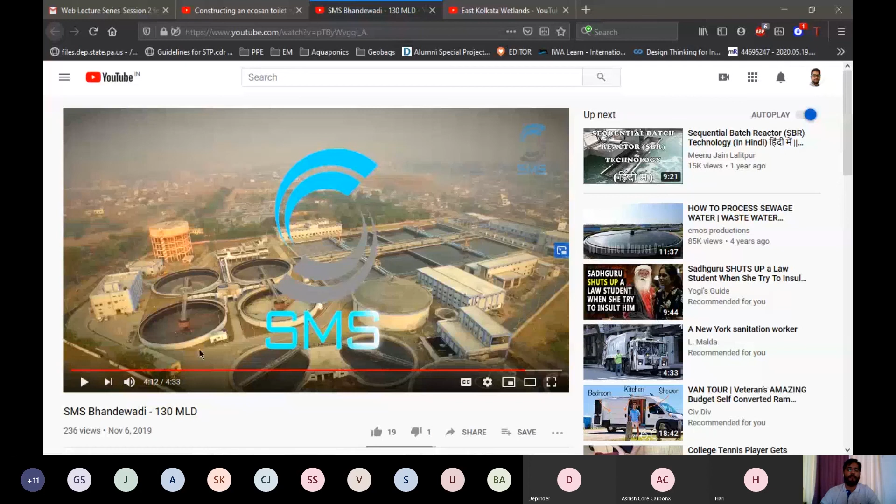In this project, you saw how the stakeholder who is going to reuse the water was identified at an early stage, and an additional tertiary treatment step was included at the STP itself so that the treated water can be directly used at a thermal power plant. The rate of the treated water was discussed with Mahagenco, Maharashtra Electricity Generation Board, before the start of the project. This PPP driven model was used to set up the whole plant.

Now let's see the second case study, on the East Kolkata wetland. I couldn't find a small video showing the actual photographs or processes, but this is a good animation showing how the treatment happens. There are several longer videos of 40-50 minutes on YouTube which show how the whole wetland functions.

Detoxification of waste using a biological system - it could be plants, it could be microbes. Now let's talk more about the process of purification taking place in the Bheri.

The raw sewage coming in passes through a sieving procedure where the coarse suspended material is released. The water moves into a flat basin created such that the water depth is not more than 50 to 150 centimeters. A flat bottom treated with alkali lime ensures an alkaline pH, which is a must for decreasing the coliform count.

Now the water, rich in organic content, is released there. Manual aeration takes place, keeping the dissolved oxygen concentration pretty high. With sunlight penetrating till the bottom, as it's a flat surface, aeration and sunlight together ensure that plankton grows there. If the plankton is allowed to grow indefinitely, it results in plankton bloom, which is a problem - eutrophication. But that doesn't happen.

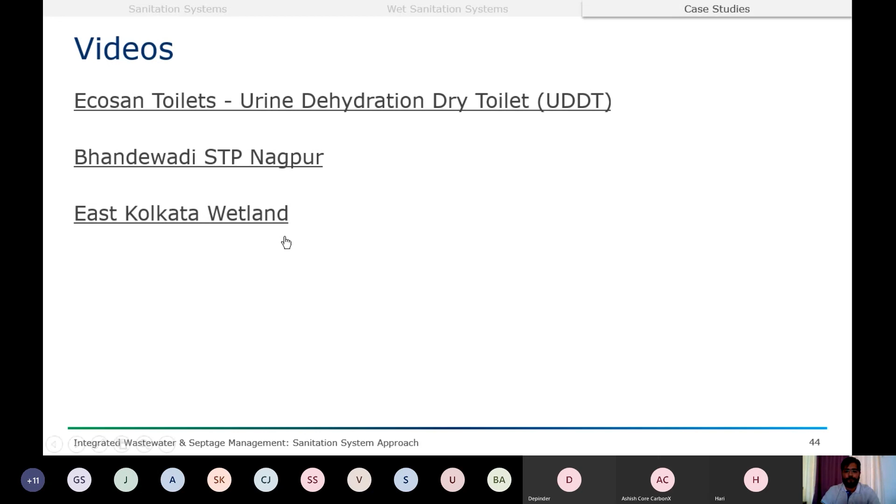So with this, we are ending today's session. To summarize, there are different types of sanitation systems with the same objective of protecting environmental health. Sanitation system approaches help us understand the urban water cycle from the point of generation to the point of reuse and disposal. One thing which needs to be understood right from the beginning is affordability of the complete sanitation system. It is not just about the toilets or the sewerage or the treatment plant, but it is about the complete system which takes care of this waste.

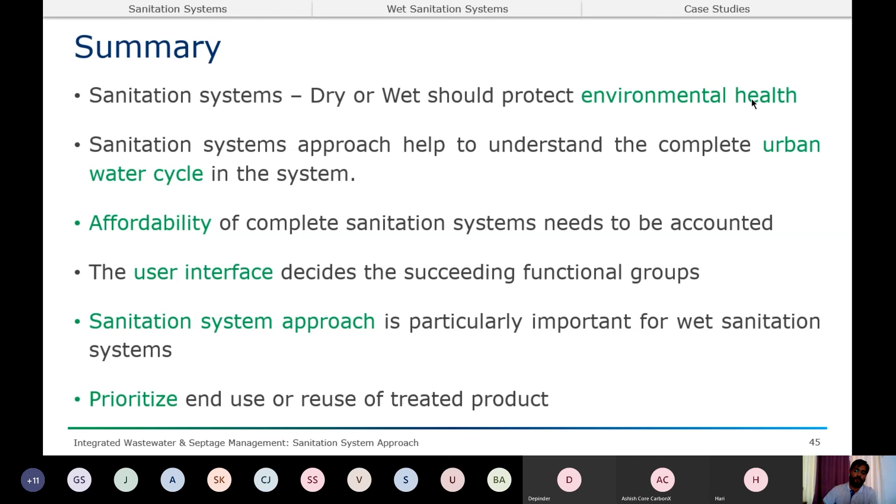The user interface plays a very important role because it determines what functional groups will come afterwards. So if you are an engineer or a company in, let's say, a mountainous region like Leh or Ladakh, and you plan to put a sewerage system, it will never function because the people there are using dry sanitation or dry toilets. So we need to understand carefully which kind of functional groups will follow the user interface. The sanitation system approach is particularly important for wet sanitation systems because a lot of functional groups come into the picture. Also, during sanitation planning, if we prioritize end use or reuse of the treated product, it eventually helps us define the boundaries of the complete project.

So thank you for today's session.

Any questions regarding today's presentation, or any additional reading material, or any additional topic you would like for the lecture sessions? Since there are a lot of participants from different parts of India, I would like to know if someone has actually seen a pit latrine or a UDDT or an Ecosan toilet before, or is it just the pour flush toilets or cistern flush toilets which are there in all of India?

Dhawal and Depinder. Yes, sir.

For a city, it can be a combination of systems - it can be wetlands plus STP plus shallow sewer, a combination of several systems. Ideally it shouldn't be the case, but in India we have seen that most cities do have different systems already in place. Since the implementation of sewerage systems takes a longer time, a lot of cities are actually served by sewered as well as non-sewered systems. For example, in Kolkata itself, there are wetlands which take care of part of the sewage generated by the city, and there are also STPs set up by the state board who looks after the wastewater treatment plants, catering to the other part of the wastewater generated in the city. So essentially, none of the cities in India are dependent on only one kind of system, and these systems need to complement each other.